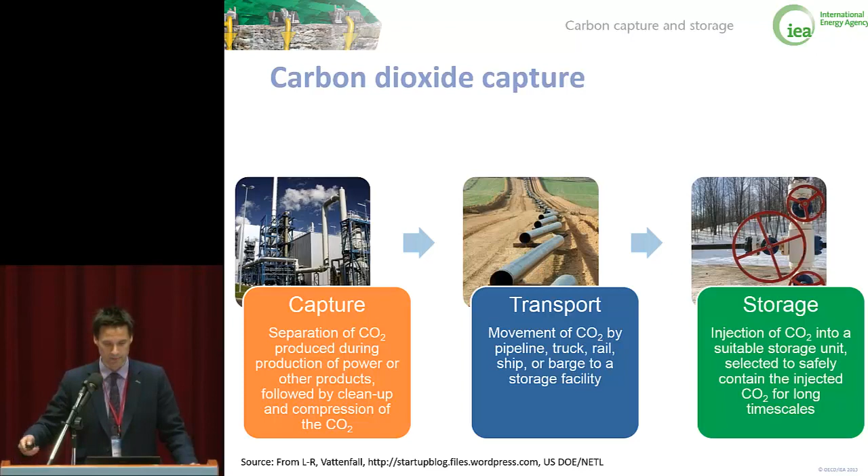On capture, why first of all do we need to capture CO2? Well, we rarely actually emit CO2 in any kind of a pure form. It's usually part of a mixture of different gases. But yet, to store CO2 or to use CO2 for enhanced oil recovery, we require very pure CO2. And we have various sources with varying percentages of CO2 present. Gas-fired power stations, relatively low concentrations in flue gas, 3 to 4%, going all the way up to even higher than 60% sometimes in acid gas streams. And the higher the concentration, the higher the pressure, usually the easier it is to capture CO2. But this capture step is always needed.

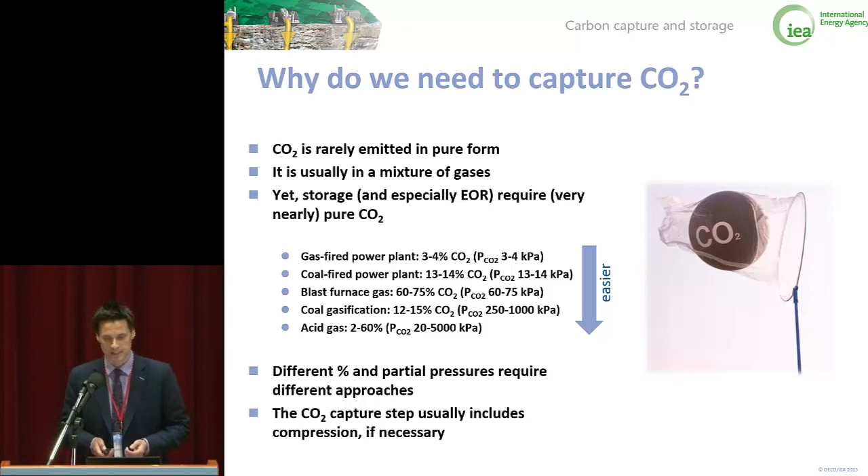Four main capture routes, as you very well will know. Post-process capture, where we essentially plug in a capture unit at the end of the production process, can be used in most sectors, especially in the power generation sector, and where we use chemical solvents in rather well-known chemical processes to actually grip the CO2 and then release it, compress it and send it forward. Syngas or hydrogen capture, where essentially we gasify fossil fuels or biomass, produce a syngas, and then remove the CO2 before combusting the remaining hydrogen in a power station, especially suited for IGCC power generation.

Oxy-firing, where instead of combusting in normal atmosphere, we combust the fuel in a high oxygen atmosphere, and that results in relatively pure, relatively CO2-rich flue gas. And then a fourth area, which is inherent separation, such as the one used in gas processing as we speak today, where CO2 separation is an intrinsic part of the production process, where the CO2 needs to be captured from a gas stream for that gas to be marketed later on.

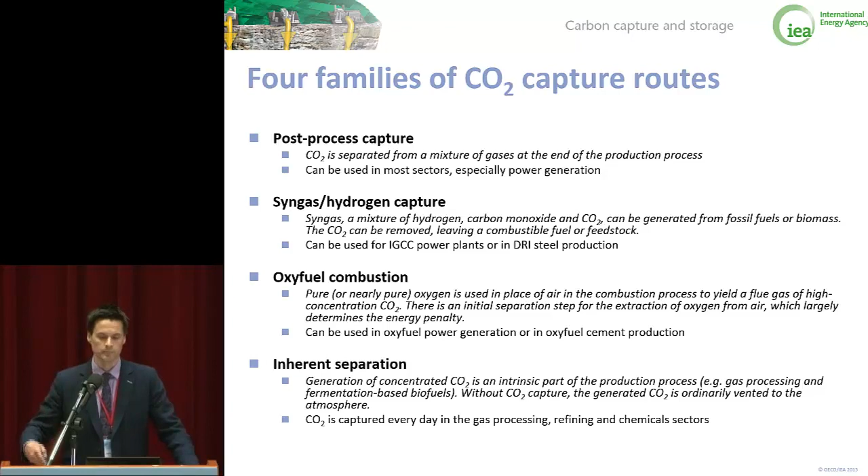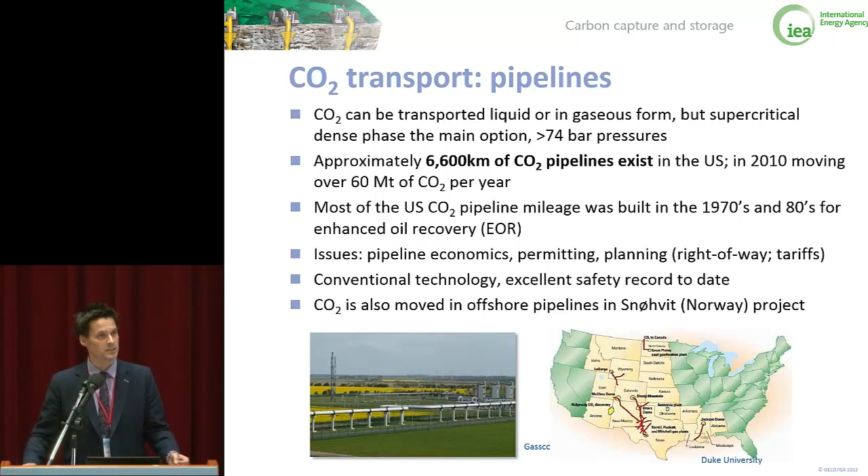Transporting CO2, this is very quick. I think this is the most mature part of the process really today. In pipelines, we already have over 6,000 kilometers of CO2 pipeline, especially in North America, and that is established practice. CO2 is piped for thousands of kilometers as we speak every day. Not an issue of technology, but obviously an issue of economics, permitting, routing, and so forth.

CO2 can also be transported by ship. Food grade CO2 ships exist, but nobody has yet built a large scale CO2 carrier fleet for the sake of carrying captured CO2 for storage purposes. But technologies are known in this area as well. So in transport, really it's not that much about technology, but about cost and which sort of solution suits which project.

Storing CO2. Now, four rather well-known options for CO2 storage are displayed on this graphic that the Global CCS Institute has produced. We have various saline formations underground, which can be used for CO2 storage. Formations essentially formed of sandstone, porous rock, where CO2 can be injected. Unminable coal seams, or used in enhanced coal bed methane recovery. Use of CO2 in enhanced oil recovery, or injection in depleted oil and gas reservoirs.

And depths in general are beyond 1 kilometer. Perhaps between 1 and 3 kilometers are the figures known from today's various projects and experience.

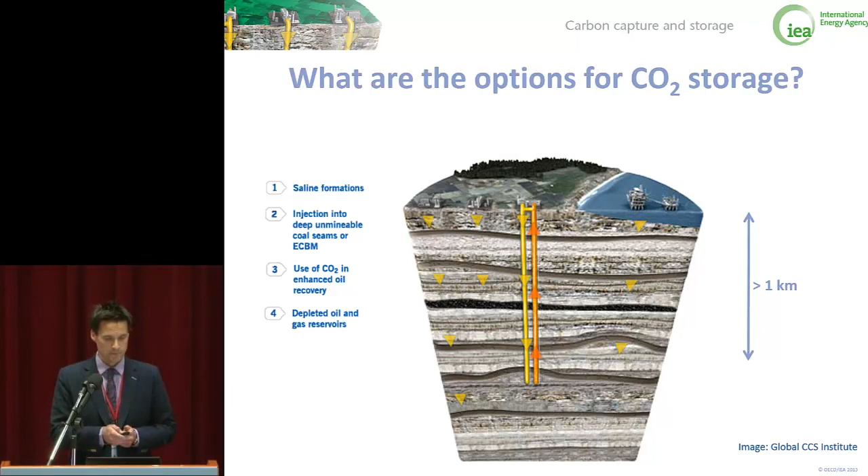Okay, here we go. If I'm lucky.

How do we retain CO2 underground? Well, essentially through four main trapping mechanisms. Structural trapping, which is perhaps the most important one, where basically the CO2, which is rather more buoyant than the brine, the saline water that it replaces, migrates upwards and at the end hits a sealing formation through which it can no longer permeate, and that structure traps CO2 in place.

Residual phase trapping, where CO2 droplets are basically trapped inside the rock like in a sponge and remain there. Solubility trapping, where CO2 is dissolved in the brines, in the salted water it's contained in, and obviously in the very long term, the mineral trapping, whereby CO2, by reacting with the rocks around it, forms carbonate minerals and is trapped permanently that way.

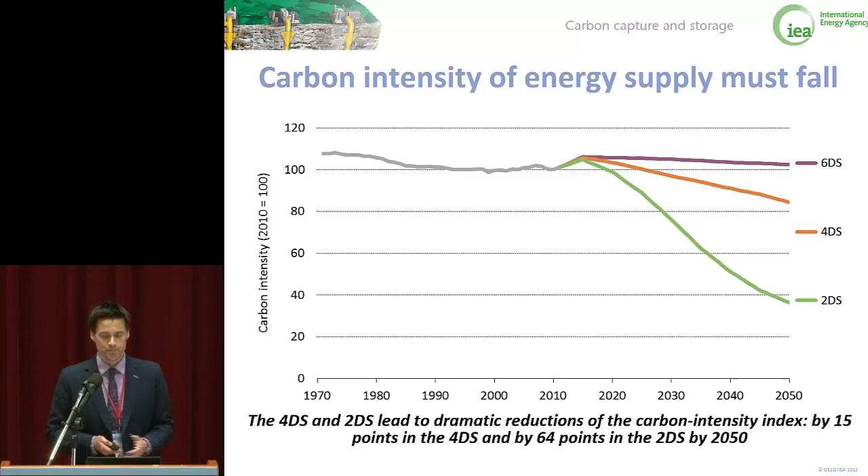What we think, however, in our 2DS scenario, 2-degree scenario, is that we need to basically reduce our energy-related emissions globally by 50% in that same time period. So actually push them down to 15 gigatons, which was the level of 1970, 1971. And to do that, and at the same time keep fueling the economies, providing energy to increasing populations, increasing GDP, and so forth, we're going to have to deploy a number of different technologies.

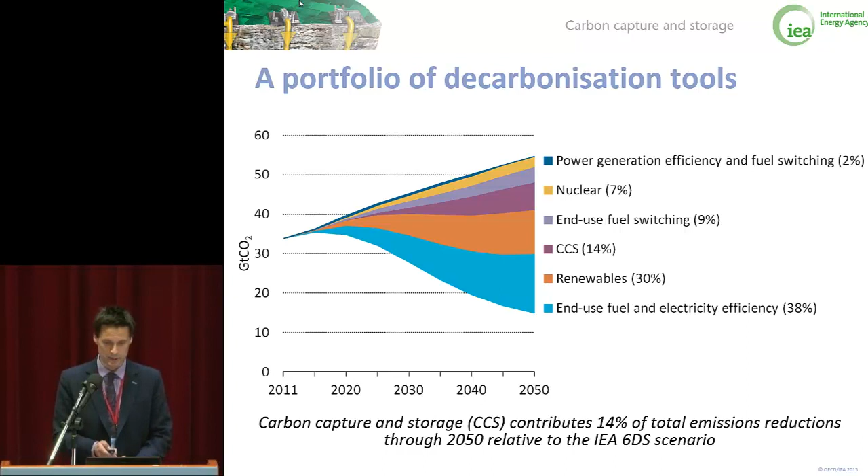Another trend that we've observed over the past scenario analysis, ever more increasingly important, is that CCS really is not only about power stations, but it is also about many other industries, from refining, hydrogen production, cement, steel, and so forth. In our scenario modeling, this varies rather much according to different regions of the world. But if you look at the global average here, it's actually 50-50. So the share of CCS in industries other than power has actually been increasing during the time that we've been modeling CCS at the IEA. So it's a very strong message also not to forget about the other sectors and not to see CCS only as a power sector solution.

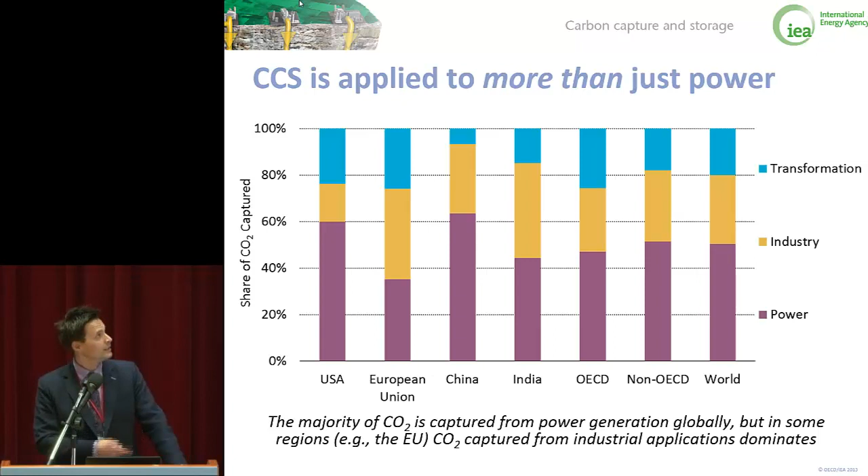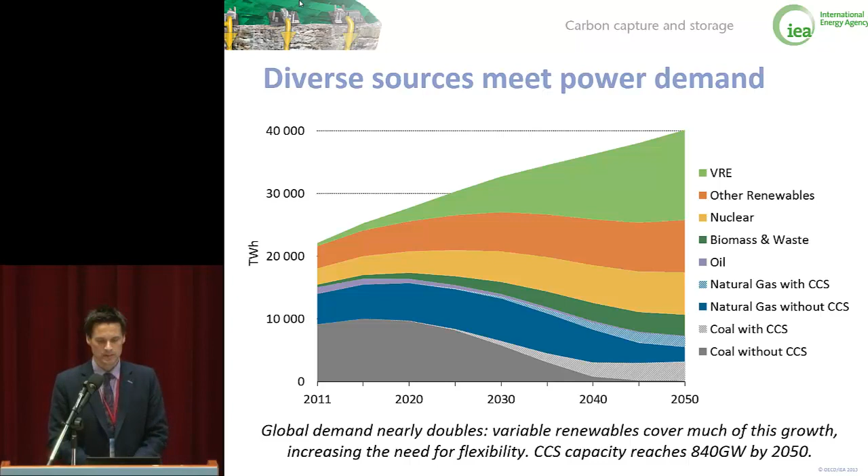So for us, the case for CCS really is quite clear. We have a justification in what we can call energy reality: fossil fuels are part of today's energy mix. They supply 80% of our energy today, and even in our 2-degree scenario, they will continue to supply 40% in 2050. So we need to do something about the emissions coming from those fossil fuels, and CCS is in some sectors the only solution. To an extent we cannot reach targets without it. In sectors other than power, cement, iron, steel, some chemicals, refining, without CCS, no other solutions really exist.

And we also think that we can gain an economic advantage by using CCS, because it can save us money. Looking only at the power sector, but keeping the required CO2 reductions and reduction ambition constant, we've taken CCS out of our investment mix, and surprisingly we would need to be investing 40% more if we didn't have CCS in place in the power sector to achieve the same decarbonization level with other technologies. So it really can save us money.

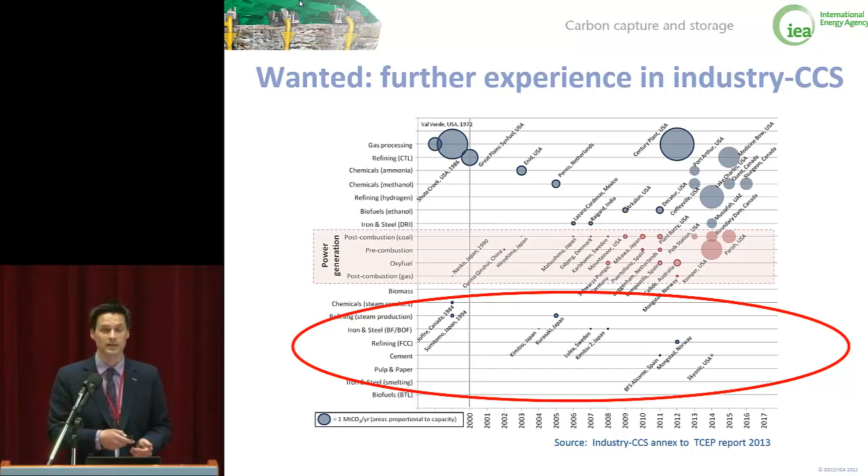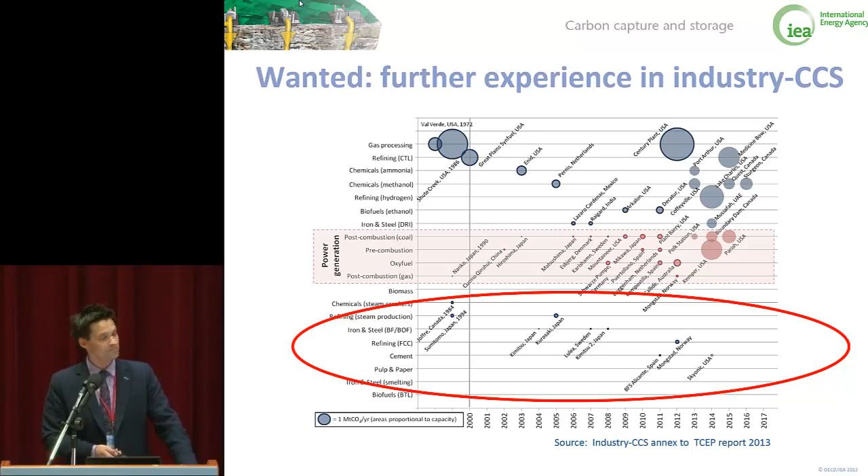I'm going to actually skip this because we're going to hear about large-scale projects in the next talk. Just to say that large-scale projects do exist and they are in the pipeline, and we should not lose hope. If we plot various types of CCS projects over a time period, in some industrial sectors, gas processing and refining, we see a number of larger projects emerging. In the power sector also we see development towards larger installations. And then there's a number of other sectors, iron and steel and cement as cases in point, where we don't really see much happening, and therefore it's nice to be here in Taiwan, knowing that you have one of the early pilots in the cement sector that we very much look forward to seeing later in the week. Talking about the CCS business case then very quickly.

Bloomberg New Energy Finance has estimated that total investment in CCS between 2004 and 2012 has been somewhere in the order of $20 billion. And you can agree or not agree with that figure. That's not the point here. The point is that at the same time, over $1,600 billion have found their way in other clean, low-carbon energy sources, mostly wind and solar in this case.

And I think this is a very simple way to illustrate that a business case for other low-carbon energies has been created by policy, has existed, and therefore there's been lots of investment. And for CCS, we really haven't seen it enough yet, and therefore the investments have been lower.

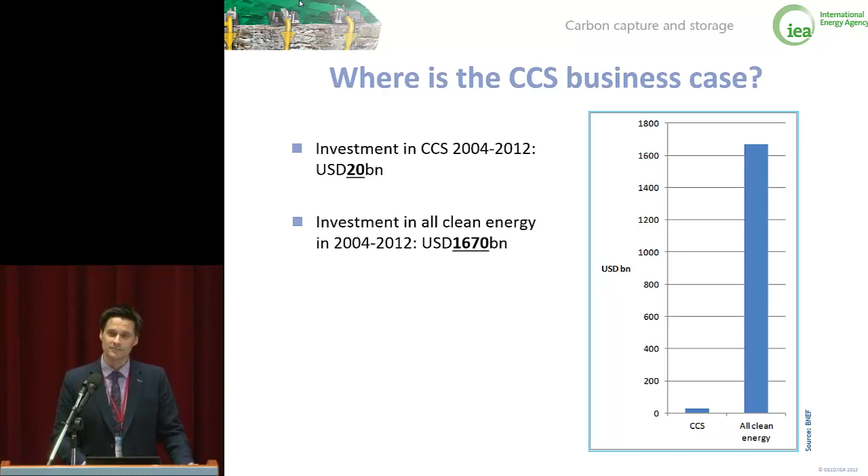So we are assembling the CCS parts. We still have lots of challenges ahead. There's both economics and policy. We have low or inexistent carbon prices. We have the unvalued benefit of CCS technology learning. It was mentioned that this first mover advantage is very hard to define. Sometimes it doesn't even exist. We might have a second or third mover advantage sometimes when somebody has already tested the technology, but for the first mover it's very hard.

In policy we have uncertainty about long-term climate mitigation goals, and consequently we have a lack or limited incentives for CCS. Obviously we still need to work on technology to reduce the cost, but very importantly also work more and more than before on aspects of stakeholders.

It was very well mentioned by Minister Wei in the first introduction that every capture technology you can actually at the end of the day buy, but the storage is always going to be local, and those projects always need to have local solutions, and they need to be accepted locally. And that's an area where a lot of work is still required.

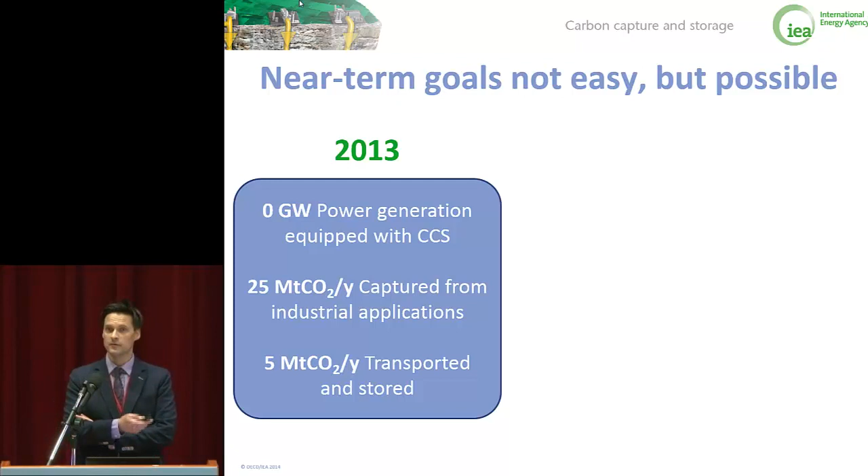Whereas in 2020 we should have 4,000 megawatts of power generation equipped with CCS. We should capture CO2 from industrial applications, over 33 million tons of it, and then transport and store by the end of the decade something like 50 million tons. But if all the projects that we know today come into operation, we might be able to reach it. So these near-term goals are not easy, but they are still possible.

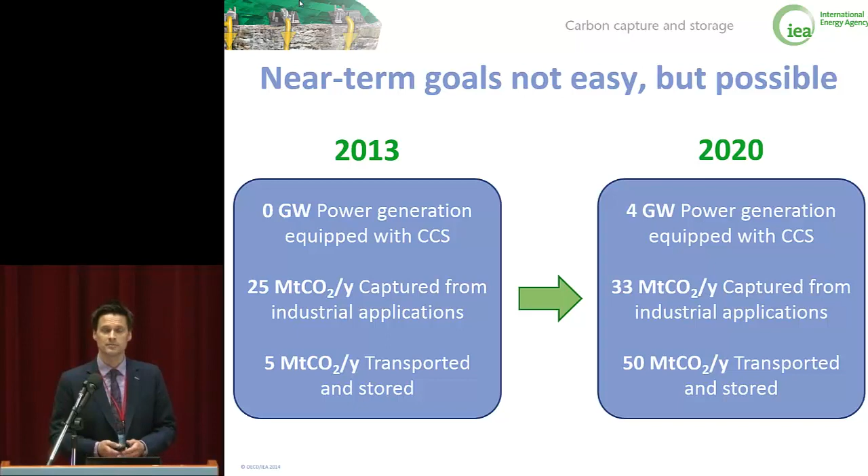We also put out key actions in our roadmap. I won't go into details of these, but I would highlight the very first one, introducing financial support mechanisms for demonstration and early deployment. This is something that has not really been done by most countries yet. We have had some early demonstration grant funding schemes available, but not many countries have yet seriously thought of actually supporting a second wave of CCS projects with operating incentives and so forth.

The United Kingdom is currently putting in place a contract for difference feed-in tariff mechanism for CCS power, which I think is a very useful first example of a deployment incentive mechanism that is going to be driving CCS in the UK and hopefully can be inspirational for other countries too. And various other key actions that we have put out.

What we're going to do with these next is develop a simple system of measuring progress against these key actions, and then hopefully be able to point to progress and point to areas where further work is needed. Now, the last part of the talk, I wanted to quickly touch upon the point of CCS requiring a strong policy commitment. Because if we don't have a policy commitment, not much CCS will happen, we think.

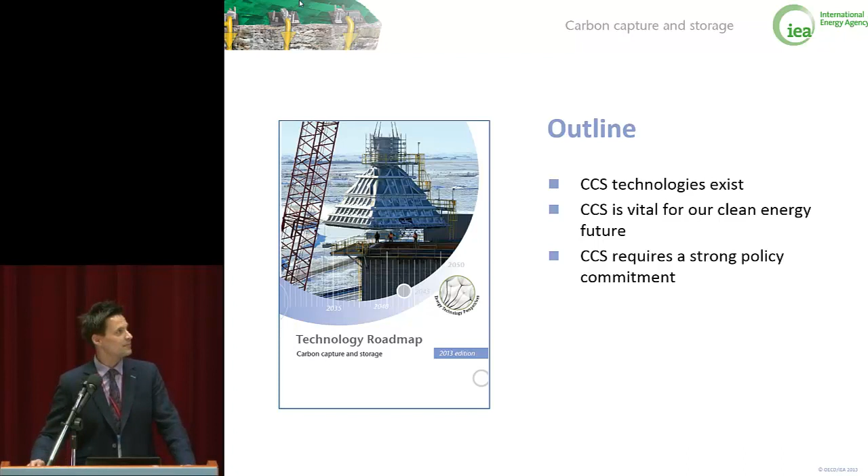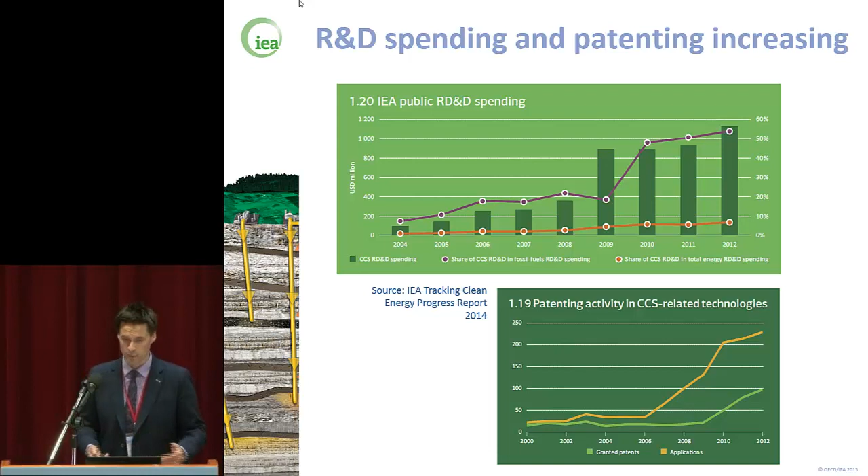I'll actually take all these here at the same time. The IEA has done some work earlier on legal and regulatory issues. One of the publications we did was called the Model Legal and Regulatory Framework, in collaboration with some other organizations, and that basically outlined the various different issues that a permitting framework, storage regulation framework should cover, starting from the regulatory scope and definitions, going to the management of different rights, property rights, competition with other interests using subsurface, then obviously the permitting, site exploration, project development, and the CO2 injection activity itself. How do you ensure that that's done in a proper manner?

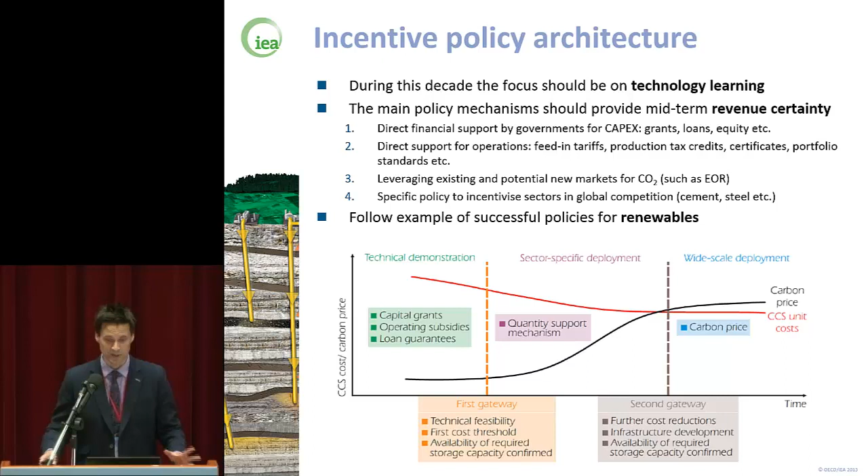Since we're out of time, I will skip the incentive policies, and I will just do the conclusions. So, technologies to capture, transport, use and store CO2 exist, and many are in use every day. However, the use of these technologies at large scale for the sole purpose of cutting emissions has developed slowly. CCS is, for us, really an integral part of our clean energy future, and in some sectors, alternatives to CCS do not exist. CCS requires a very comprehensive policy commitment, and this ongoing decade where we live now is really critical for kickstarting CCS deployment.